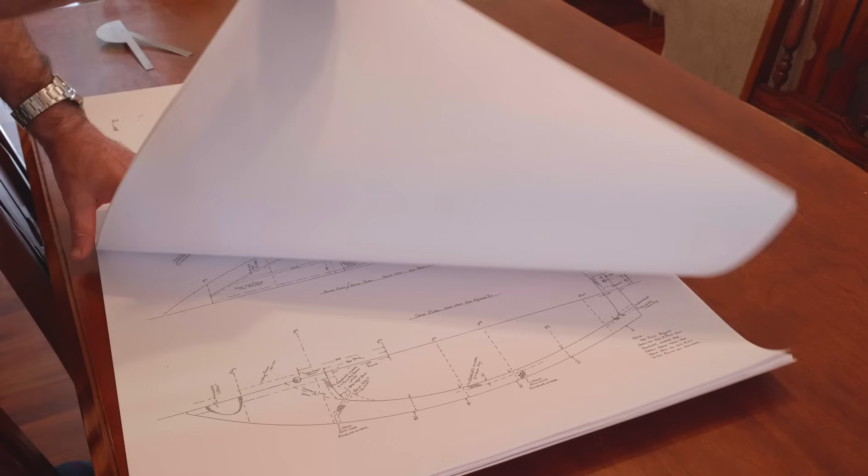Now, a lot of you found us as Free Range Sailing when we were sailing around Australia on a 30-foot sloop called Marul. We had big adventures on a small boat, and it looks like if I want to have a bigger adventure, the boat has to get smaller. So now we've got ourselves food self-sufficient on the property that we're at here in Western Australia. I've freed up a little bit of time and resources to build a boat because, as you might have guessed, I'm starting to miss the ocean again.

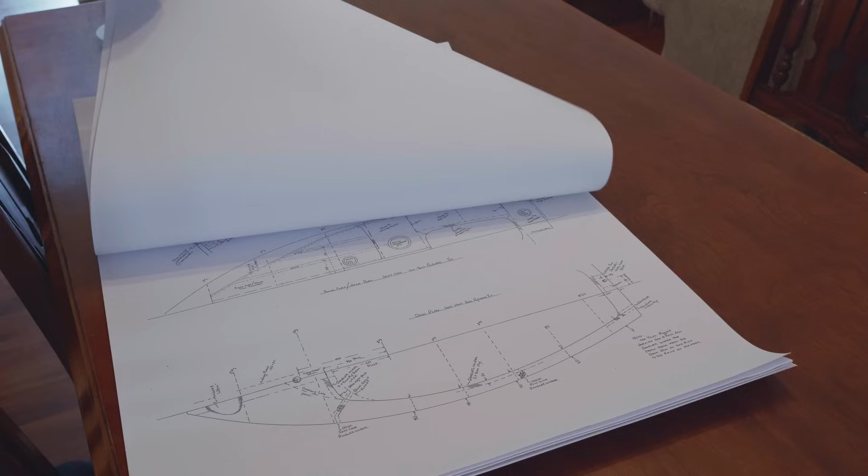Here's the plans. The boat that I'm planning on building is a Pathfinder. It's a gaff rig yawl, by New Zealand designer John Welsford, and I've included the links to his website where he talks about all of his current designs and offers the plans for sale. You can find the link in the description to the video.

I also want to thank Ross Barnett over at the Facebook group, the John Welsford Small Craft Design page. He's just let me use his photos of his Pathfinders, plural, until I build one of my own. So again, Ross, thanks very much.

So this is an expedition dory. It can be trailered with the family car. It can be taken out, doesn't have to be left in the water. It's only fairly small. But having said that, some of these designs are getting around as high as Finland, those high latitudes, not to mention people sailing around the bottom of Africa, the bottom of Australia, all over New Zealand. They're all over the place. So they're actually quite an ocean-capable little vessel.

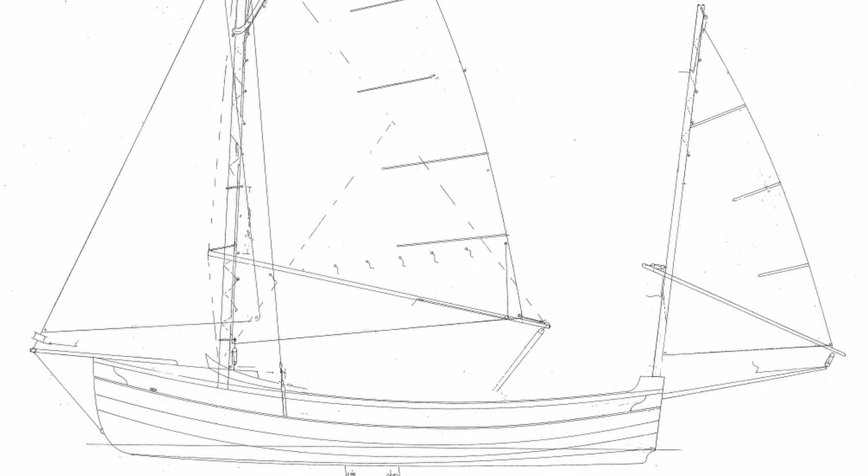And when I say little, let's just have a look at the vital statistics. The length is 5.25 metres, a beam of 1.95 metres. The jib has an area of 3.45 square metres. The main is 8.6 metres squared. The mizzen, this little sail at the back, is 3 metres squared, for an estimated weight of 220 kilograms. So, not a massive vessel.

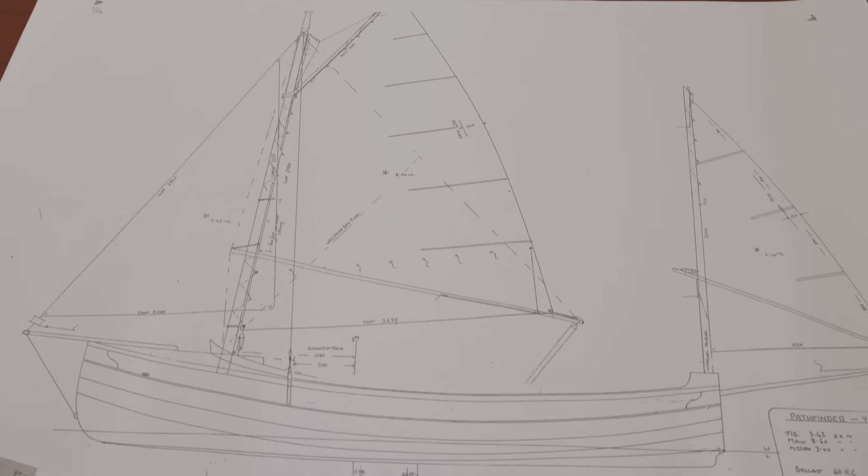I was attracted to this design by the sea-kindly lines of the Pathfinder. They make her a smart looking little ship, and normally what you'll find is boats that look nice to our eye, those fine lines in a vessel, usually add up to quite a sea-kindly design. So you can often go very well by the looks of a boat, how she's going to perform.

I particularly like a gaff rig as well, because that allows for a shorter mast, less stress on the hull. They've sort of been proven through time. Maybe not the fastest rig, like when compared to some highly tuned Marconis and things like that, but that's okay.

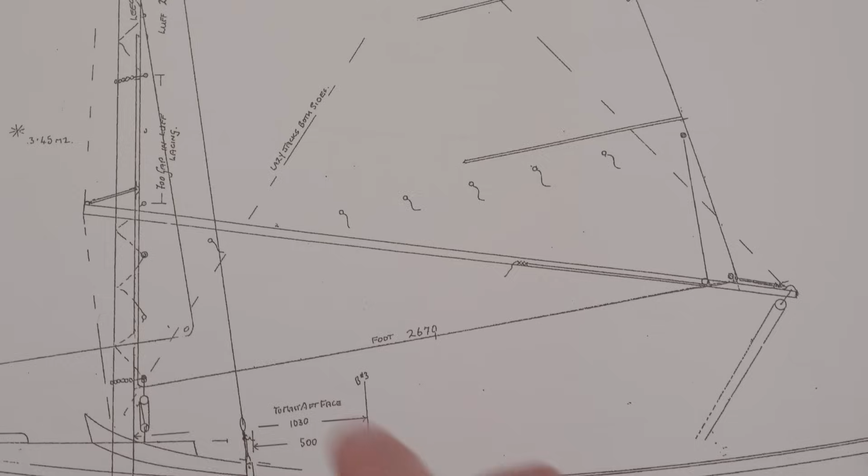I like simple. One interesting design point that I'm looking at here is a sprit boom. Due to tension from the sail foot acting on the end of the boom, it allows us to do away with a boom vang or boom jack, whatever you want to call it. That means the main sheet - on Marul, the main sheet had to also pull down on the boom to prevent the sail from twisting. Obviously on a sprit boom you don't need to do that, so the main sheet is only just moving the sail and the sprit boom athwart ships. So you don't necessarily need such a strong main sheet pulling down on the boom, which is nice. What else can we see here?

That yawl sail configuration gives a fair bit of versatility when the weather deteriorates. We're on the south coast of Western Australia, and it can get dangerous, it can get nasty really, really quickly here. So I do want options in heavy weather if I get caught out.

If you've been with us for a while and you've seen some of our videos getting around in our little 30-footer, we like to sail a boat fairly hard. So I do want those options. Any safer sail set that I can get in a storm is very, very welcome.

You've got other advantages with yawls as well, it's not all about safety. You've also got a very nice riding sail at anchor, and if you want to heave to, reef early, or just stop the boat and point it to weather, you can drop everything, and a yawl makes that possible. That mizzen's just out the back, acting like the flight on an arrow, which is very nice.

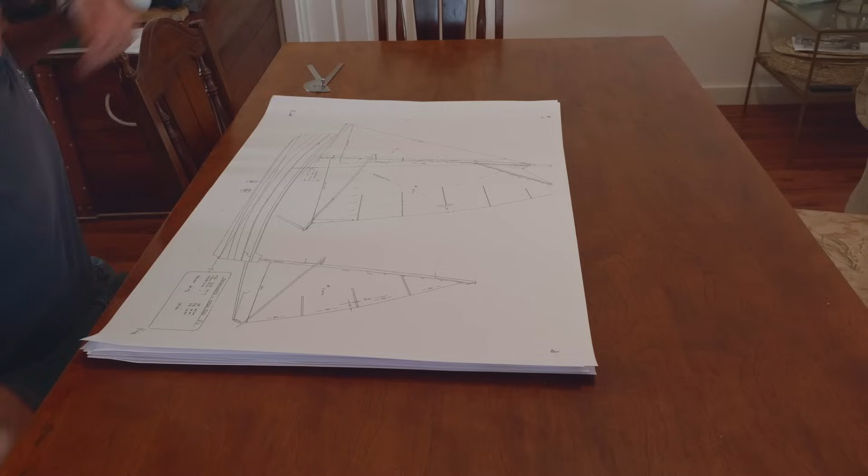What might not be apparent from these pictures is the hull is built around a flat bottom panel with a foiled centerboard. This means these hulls have the ability to plane and go faster than hull speed. Ross got in touch and said his Pathfinder will do about 5 or 6 knots, very similar to our 30-foot sloop Marul, so it will have a similar range.

I guess one of the benefits with a trailer sailor is that you can go to windward at 100 kilometres an hour, which will be a very nice change.

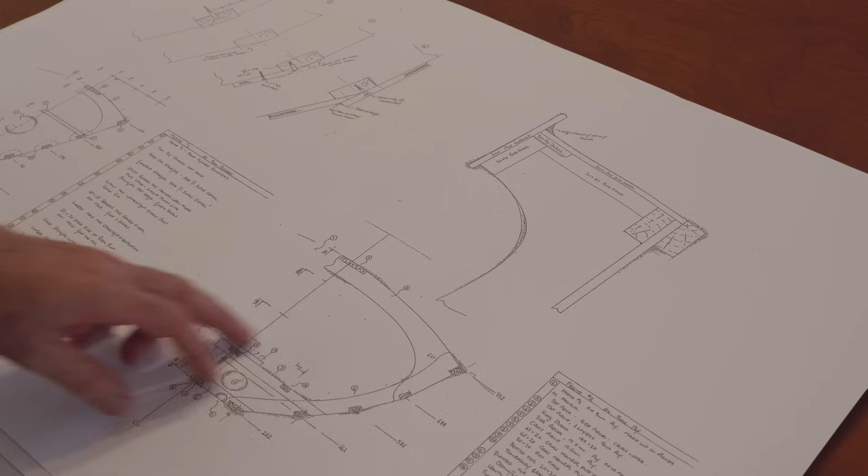So looking at the plans, the construction method for this is stitch and glue plywood around pre-cut frames and stringers. The way it's done is you trace everything out onto plywood and basically make your own kit. Many of you have watched us tackle fairly involved refits, so I bring a bit of experience to this, but this is my first boat construction, so I'm sure there'll be some lessons to be learnt along the way.

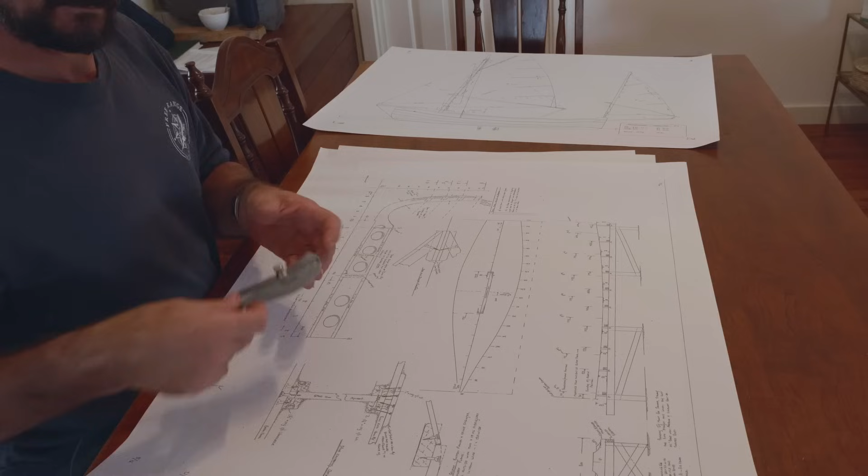I know there's quite a few boats being built on YouTube, but this particular one, it might not be for everyone, is a project with a very modest cost, a modest time to completion, and a modest space requirement. I'm not going to estimate my time to completion, but I want it to happen fairly quickly. Next summer I want to be out there crashing around in this thing. So it's well within reach.

Some people might be watching this and get inspired to build a boat of their own with their loved ones, your wife, your spouse, your grandson, your granddaughter. I don't know who it is, but maybe you can get yourself into trouble as well. I don't want to be the only one. I'd like to hear in the comments from anyone doing a boat build, particularly if I'm going down the wrong path, or sometimes we get very nice comments that we've inspired people to do some really great things. That's always a nice part of our job. It is a job, what we do here.

Alright, so I've received the plans, like I said, and I'll be assembling materials from here on out. If anyone knows in Western Australia, in the Perth area, or Bunbury, of any inexpensive marine ply, softwood, or any boat building materials, I'd love to hear from you. I'd like to save a shekel or two if that's possible.